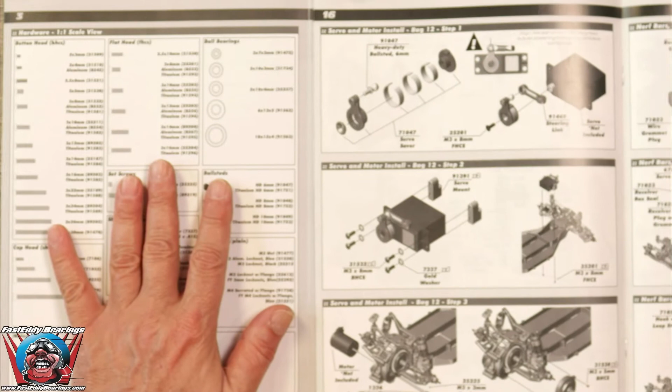What I really like is when you open it up, it shows you all the different parts you're going to be using, as well as a one-to-one scale so you can lay your parts on top and measure them to make sure you're using the right pieces to build your kit. The other nice thing is that as you're building, they let you keep this open as you flip the pages. Very interesting, I like that.

I haven't seen that before, but it's been a long time since I've built a kit. So let's get going here.

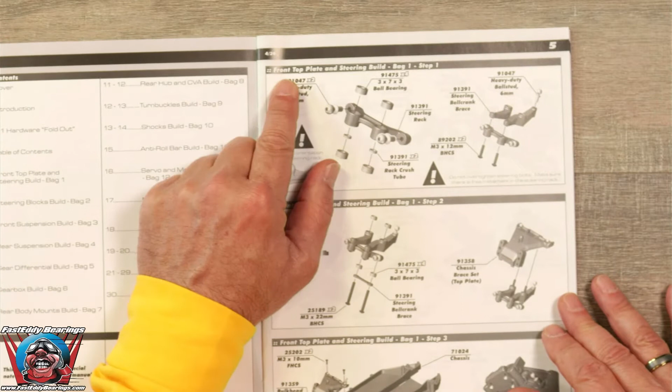The first thing right here is the front top plate and steering build, which is bag one, step one.

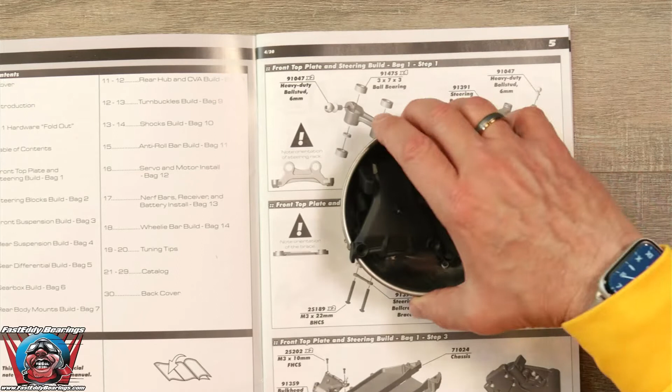We've gone ahead and opened up everything out of bag one. You're always going to want to make sure that you empty your bags before you throw them away. Many a time I have dug through the trash can, and what can you say?

So we're going to take a look at the first part here. We're going to get out the steering rack, which is part 91391.

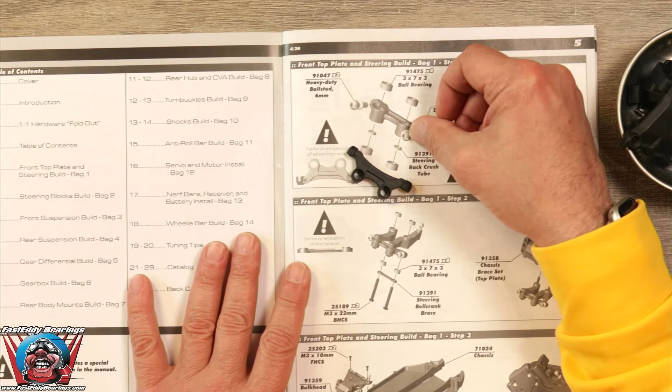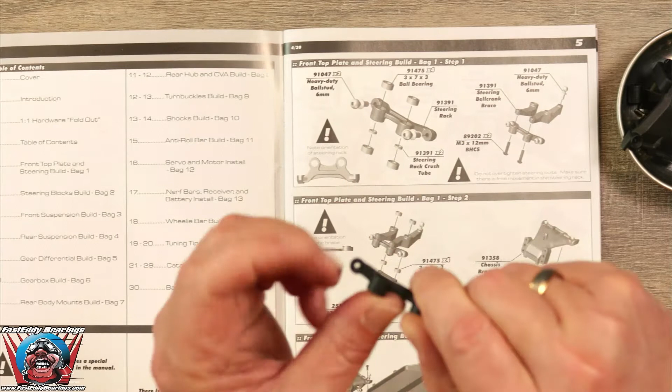If you'll notice on the directions, there is a top and a bottom to it. The top portion is shorter than the bottom portion. Let's see if we can get this into focus so you'll be able to see what I'm talking about - the bottom here is taller than the top part. So we want to make sure that's always proportioned in the right direction.

Get focused here, come on. Focus. Ooh, nothing like needing a new pair of glasses, huh? There we go, okay, I might have to turn that autofocus off.

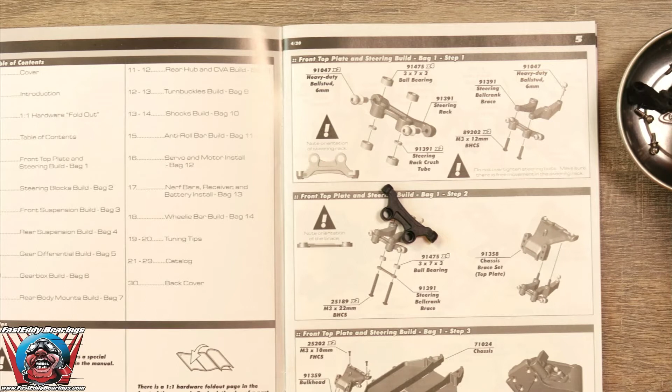So, ball studs. Let's go ahead and start with the two ball studs here. They're a 6 millimeter ball stud, and in bag one, they are the only ball studs.

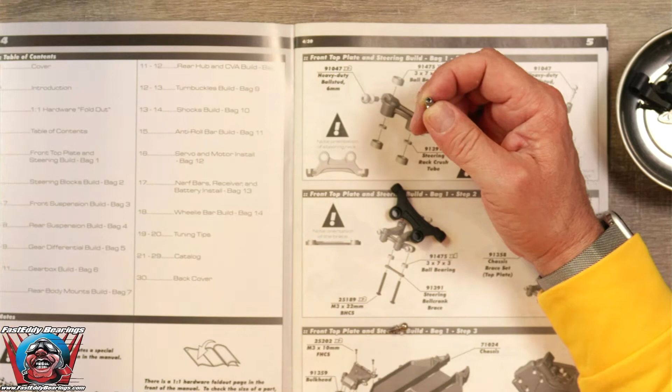To install them, looks like we need a 2 millimeter hex. So I'm going to grab that, and I am correct. We're going to use our electric drill and set the clutch to very light, let's just set it on a 2. You don't want to over tighten these when you're using an electric drill.

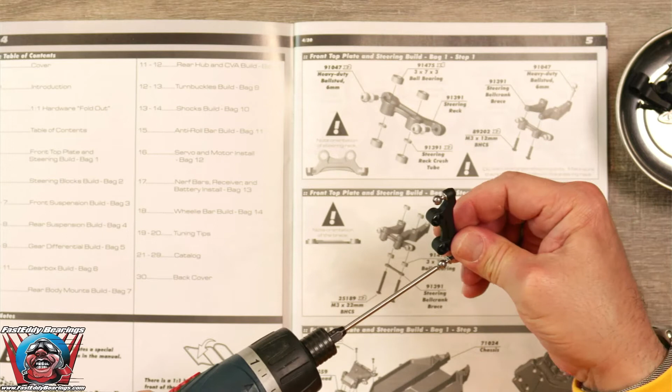Perfect, so we're going to go ahead and get the ball studs in there. It has been, like I said, I think 6 years since I've done my last video, so I'm a bit rusty on building on camera here.

Okay, so we have those in, they're nice and flush. Just for the heck of it, whenever I'm using an electric drill, I like to finish up with a hand wrench just to make sure they're actually in there and tight. You don't want to over tighten them.

Okay, next it looks like we have the bearings and crush tubes. The bearings that come with this kit, we're going to use 4 of the 3x7x3s, which are right here. And if you'll notice, these are an open shielded bearing.

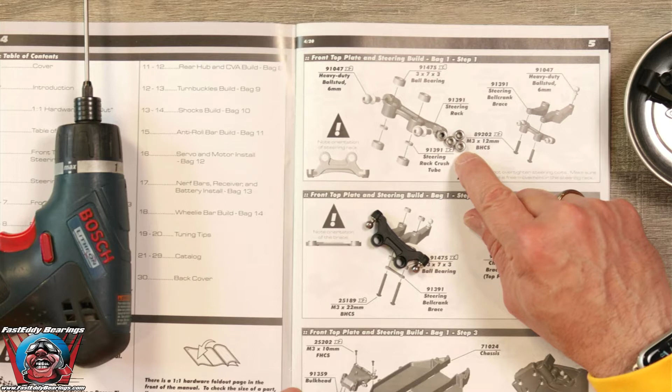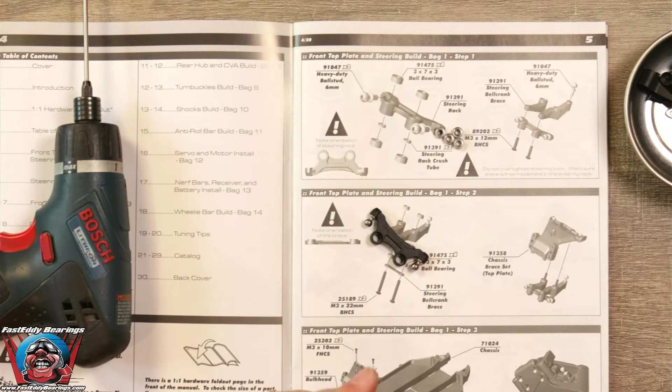Now, the shielded bearings do offer a tad bit less rolling resistance, however they do let debris and dirt and stuff from the track into the bearing. So we really do prefer a rubber sealed bearing, and on this build we are using the ceramic sealed bearing kits.

Like I said before, we also have a standard option. If you're going to be very serious about your racing and want to be competitive, everybody is using our ceramic bearings.

So let's go ahead and take 4 of these out. You can buy your bearings at FastEddyBearings.com, you can buy them at AMain, you can buy them at RPP, or your local hobby shop. We are available now through distribution worldwide, so if your favorite hobby shop doesn't have them, ask for them, or you can always just order them direct.

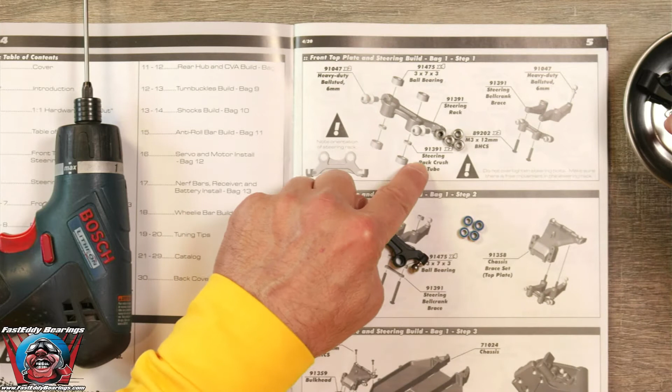Okay, so the next thing you're going to see on here are what they call crush tubes. Very interesting - a crush tube, if we lay this on top of the bearing, you're going to see that it covers the... let's see if we can get this up here without dropping it. Come on.

You'll see that it covers the inside race, but not the outside race. That means we can stack two bearings on top of each other and it will not hinder the rotation. So that's what a crush tube is for.

We're going to put the bearings in first, starting with the bottom ones. We're just going to press them in, making sure that they are flush. Just use your thumb to push on the bearings. If they're not going in properly, you can press them in on the table.

Next we're going to put the crush tubes in, and then set a bearing on top of the crush tube. This bearing looks like it's going in flush - yes, it is. If you take a look through the hole, you can see that the crush tube is centered. A way to make sure of that is to stick something through there and make sure it's actually allowing it to pass through.

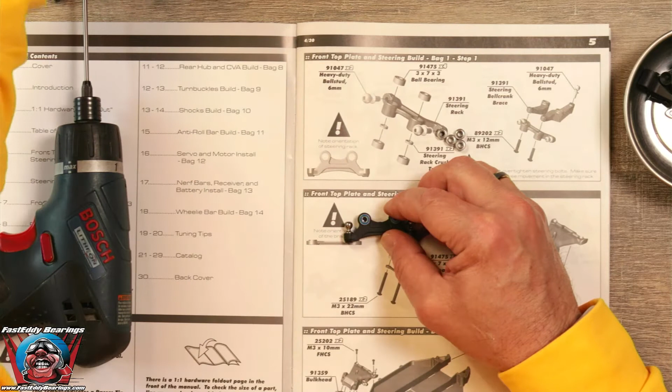Having a little trouble getting that one pushed in. Let's see what we can find here. That one is too big, this one I think is going to be too small - no, that one fits right on. What I'm finding is something to put around the outer edge of that bearing so that we don't hurt the bearing while we push it in. There we go.

And it seems that the crush tube is getting in the way. It is. So let's skin this horse a different way. We're going to put this one in first, which now pushes all the way in very easily. The crush tube is still in there. Now we'll put this bearing in. Let's see if we still - there we go. Now they are both flush.

That was a little difficult there. Again, we're going to make sure that everything is the way it should be. The crush tubes are in there, and the bearings are operating properly. Okay, that was harder than it should have been.

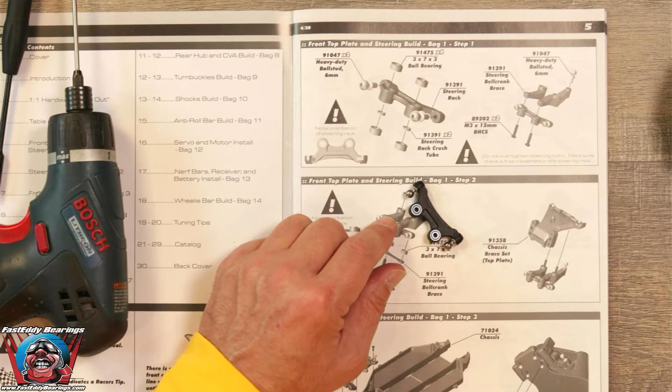Okay, now what? We are going to take the factory bearings and move them out of the way and actually throw them in the garbage. No matter which set of the FastEddy bearings you get, they are a very good upgrade from the factory.

Okay, so now we have this done. We're going to make sure we position that properly. And now we are going to dig out our two wiper arms. We have one wiper arm here and another one here, and we need one more ball stud. There we go.

So let's take a look here. The bell crank brace - there are two of them - and we need to take a look here. This one right here, you're going to see it bends this way. And this unit here, we have to decide which way this is going to go.

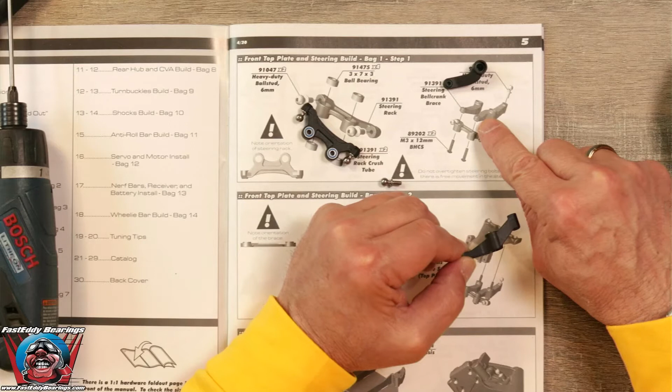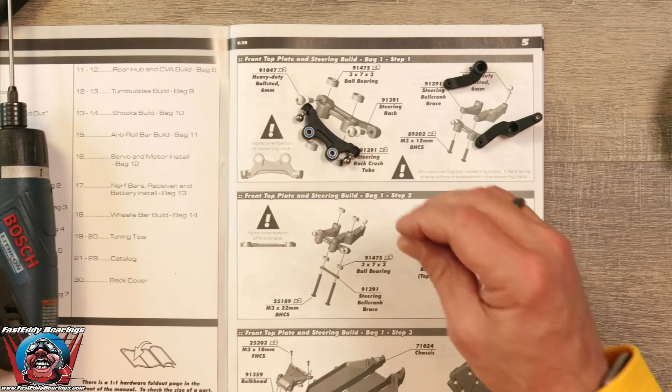I believe it is going to go on like this. It's hard to say, I'm just kind of looking at this little portion here. Looks like it matches up with that and curves in this way. So I think we're good there. And we have our ball stud - let's go ahead and put our ball stud into the top of this one.

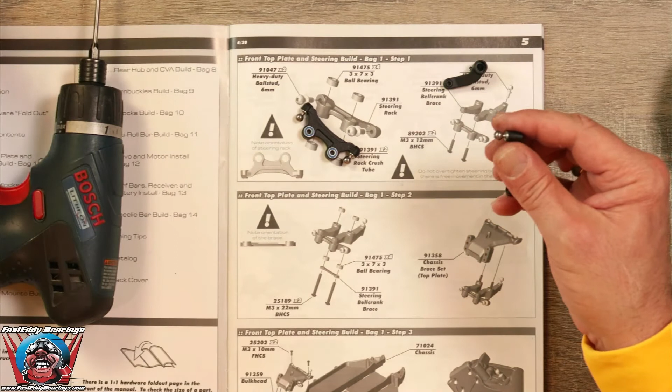I'm going to crank that up just a little bit more, and we'll hand tighten it. Now we need two of the M3 by 12 button heads.

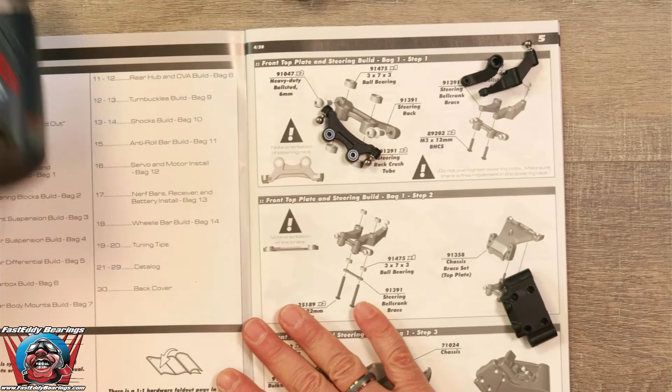Taking a look in our dish, we have two 12mm button heads, and here's how we know they're 12mm. For the new people that don't know a lot of this, we can take a look at the button head - whoops, this one is a 22mm. We need the 12s, so good thing we checked. We're going to go to the 3 by 12s, match that up, and see that's the one we'll be using.

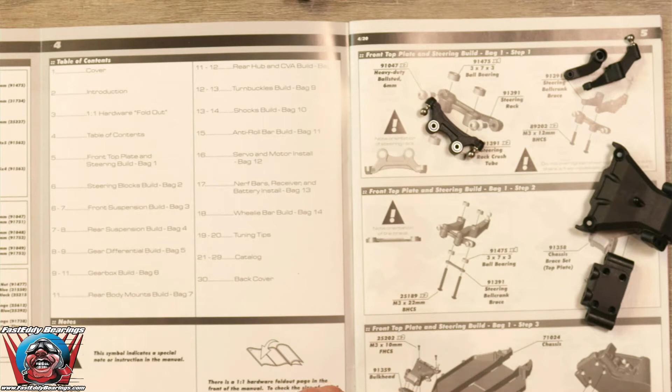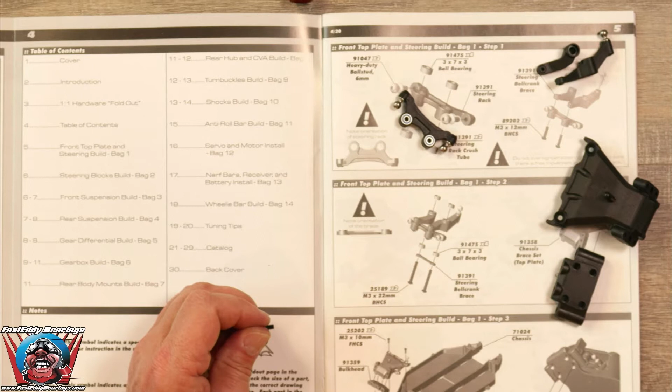Woo, what do we got going on with the camera there? Very interesting. Like I said, this is a new setup, and we're running into a glitch here. My goodness. Okay, we will be right back.

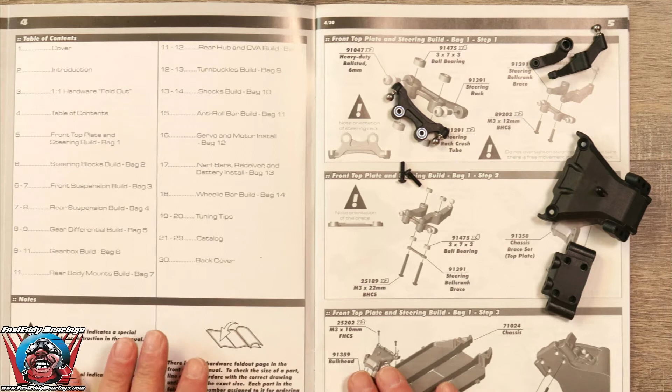Well, I'm not really sure what all that was about. I think it might have been a plug. So let's switch back over to the overhead and see if it goes away. Hey, I think we're okay. Let's see if our gremlins come back. Like I said, this is a brand new studio for me, so we'll see what happens here.

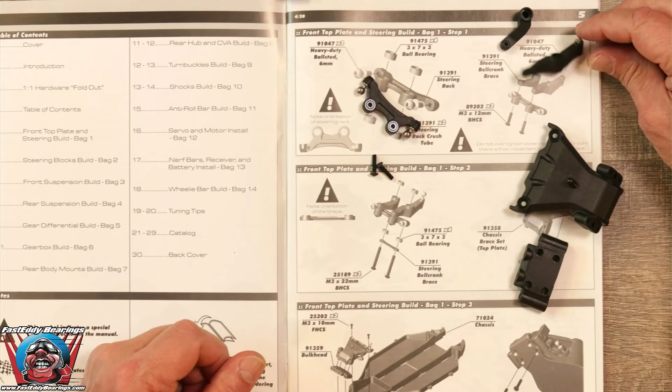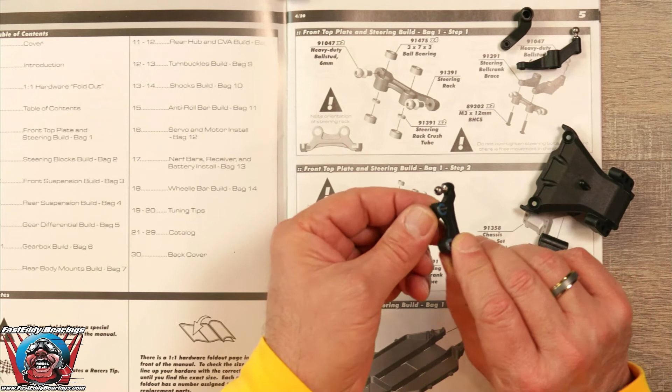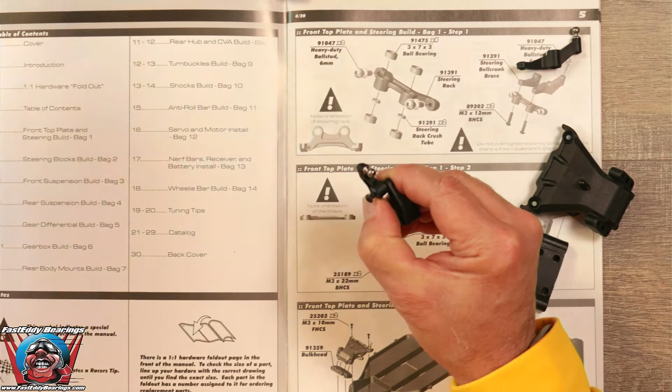Okay, so we have the ball stud in, and we found our two M3 by 12s, and those go up through the bottom. We'll start with this one and screw it in. That's what it looks like we're doing here.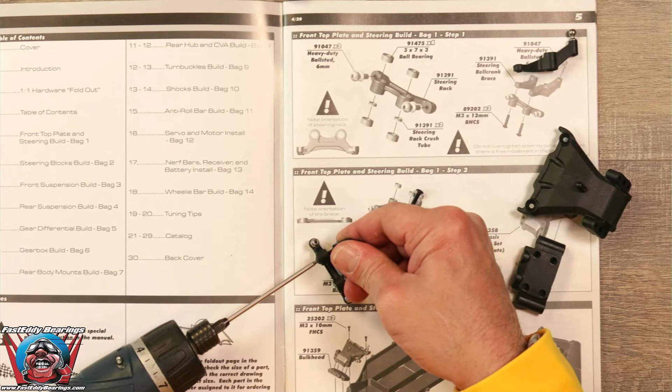Okay, you know what? I put that one in backwards. Let's try that again. Go ahead and take it out, turn it around, put it back in. There we go. Okay, so did I screw up again? Here we go.

Wow, it has been a while. Let's try this one more time. Like I said, this is going to be fun. What I'm doing here is going through the bottom like I'm supposed to, and these go in from the back side. There we go, that's what I was doing wrong - I was trying to put it in from the front side.

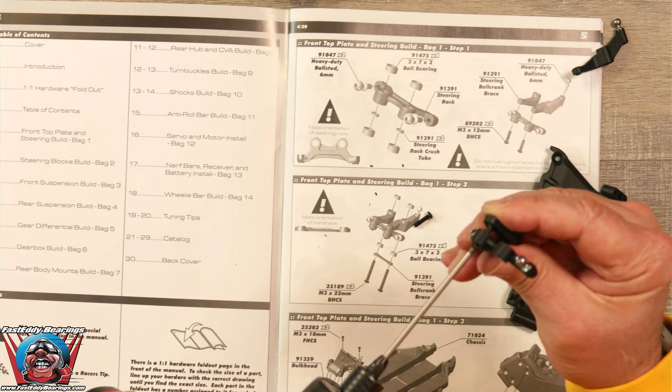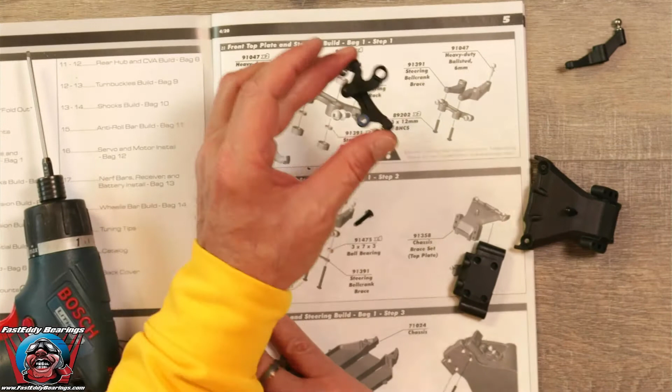Okay, did I get that right this time? Take a look at the directions - this is curving this way, this is the front. We have the larger, taller portion facing down. So we are on a roll.

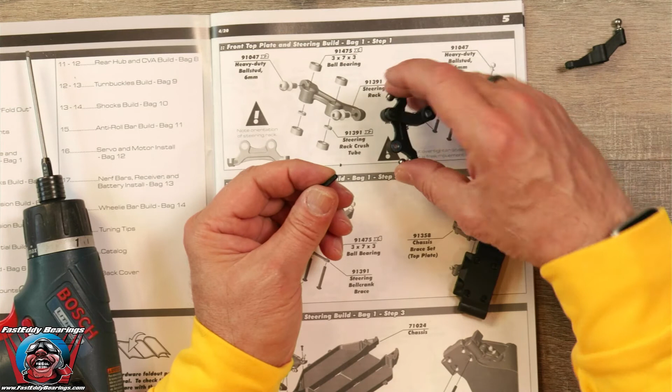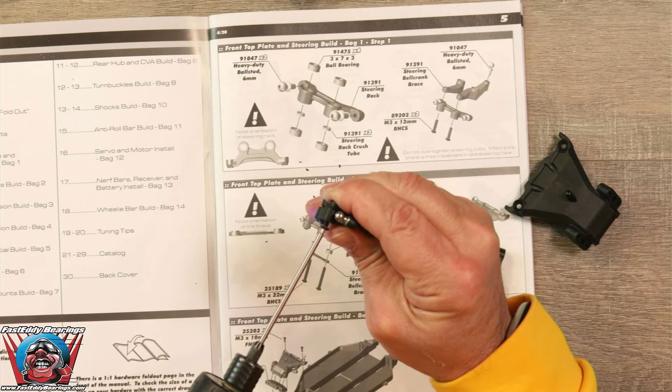So let's get this next one in. Again, we're going to go from the bottom. We're going to make sure this is positioned properly, which it looks like it is, and we're going to come in from this direction and get a rocking and a rolling. There we go.

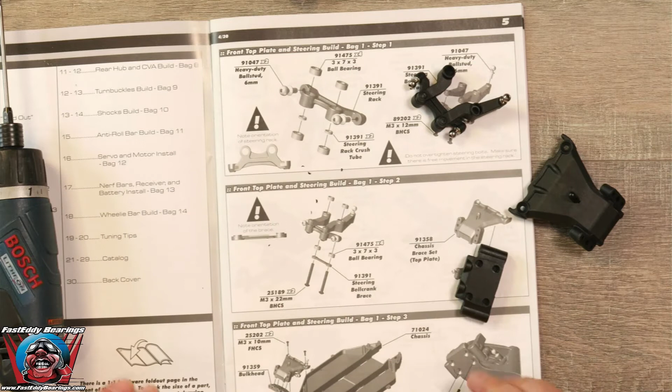Okay, we want to make sure every time we put something in, we test it and make sure it actually moves freely. There we go, wow, look at that. We got the first part done. We're on a roll now. Woohoo! So let's take a look here.

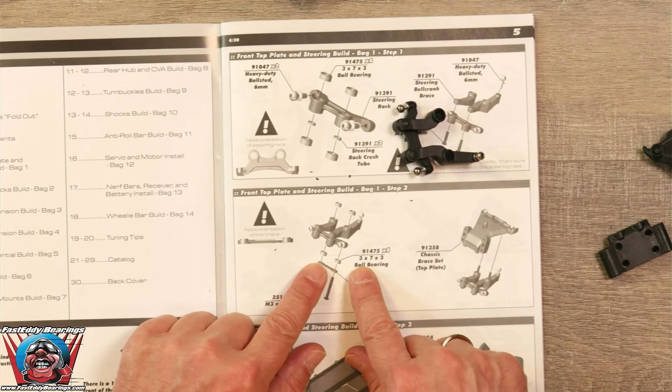For the next thing we need to do here is bag 1, step 2, and it looks like we need 4 more of the bearings. So we're going to get 4 more of the 3x7x3 bearings, which are the smallest ones in the kit. We'll get out 4 more of those, which is all that there are - so all the little ones are gone.

Okay, so let's take a look here and install. Looks like one goes here inside of this arm, presses right in. We're going to put one more in the bottom one, presses right in. And we're going to do the same for the larger, longer arm. There we go, look at that. We're on a roll here.

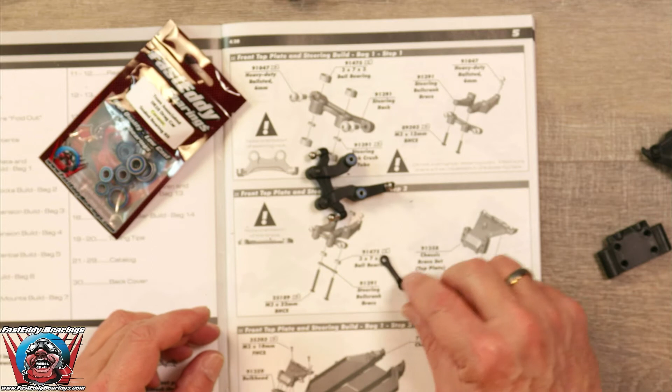Now we need to tie these two arms together with this little brace right here. It is a bell crank brace. Let's focus in here, come on.

I'm going to have to work on this overhead camera. There we go.

And we need the 2 M3 by 22s button heads, which were the ones that we grabbed by mistake the first time. And these are going to go up.

Let's see here. This part has a top and a bottom. If you take a look at the directions and at the part here, it is flat on the bottom, and there's a teeny tiny little ridge here on the top. I'll get that back into the camera. Teeny tiny little ridge, then it's flat on the bottom. So we're going to stick this from the bottom.

We'll put both of those up through like that, and we will come up. Let's take this piece and flip it over, and these fit right up in there like so. That ties the steering together.

Okay, and now we are going to grab the chassis brace, which is here. And as you can see, this is the way that it sets. And we need to screw these 2 screws into these 2 holes here, it looks like, from the directions.

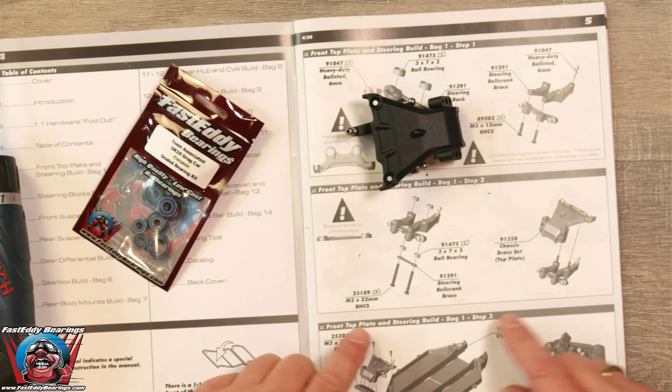Now, we are going to go to our step number 3. And it looks like we are going to use 2 of the M3 by 10s. And these are a flathead screw. The flathead is a bevel. Some people call it a bevel screw. You can see the bevel on there. And these are...

There should be 2 left. There are 10s and 16s. So these are the shorter ones, which are 10s. And we can, if we want to, match them up. There we go. They are 10 millimeter.

So let's go ahead and grab our chassis. Where did I do with my chassis? Here it is. And we are going to set this down along with the chassis block, the bulkhead. And the bulkhead has a bottom and a top and a front and a back.

The front has 2 screw holes in it, and the bottom has a relief in there. So we are going to set that relief down, and it fits right over the chassis here. It sets in there.

And we will take the rest of the steering assembly, and this is going to set on top. You can see that there are 2 screw holes there with actually cones on them, and then you can see the inverse of the cones here. It's going to sit right on top, and it should line up in the front with the bulkhead.

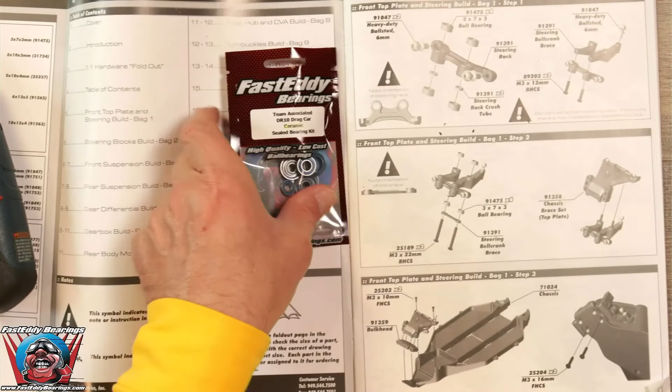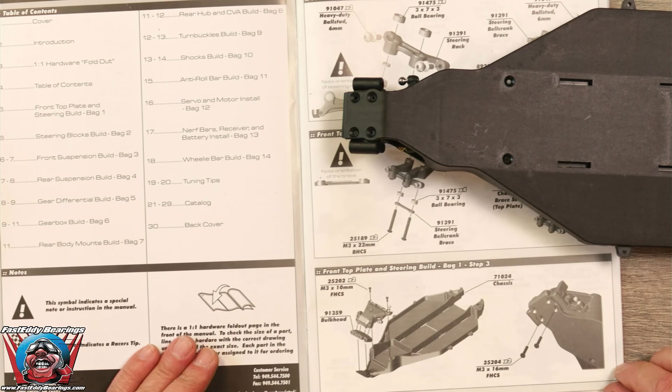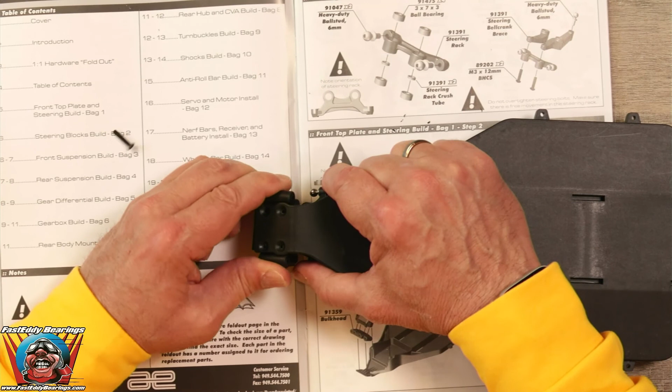And there should be 2 more screws, which are shown down here on the bottom, which are the longer ones. And it is showing that those go in the 2 rear holes. So there's 4 holes here, and these are going into the 2 rears. That was a little bit out of whack because I couldn't see the holes lining up, so we'll put it in so that it's straight.

And we are done with the steering. Just like so. And now that we're done, we just want to make sure that everything is moving freely. Look at that. I think we did something right here.

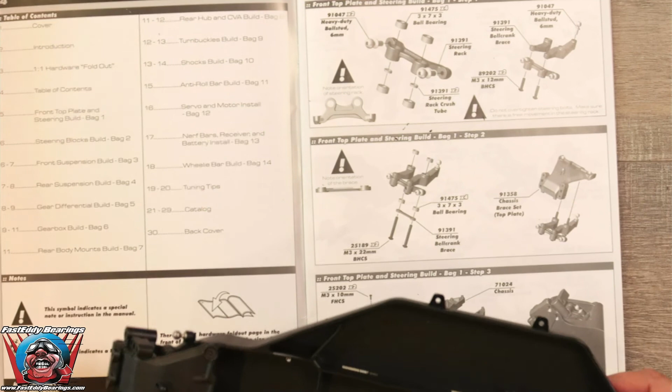Okay. We have completed step one.